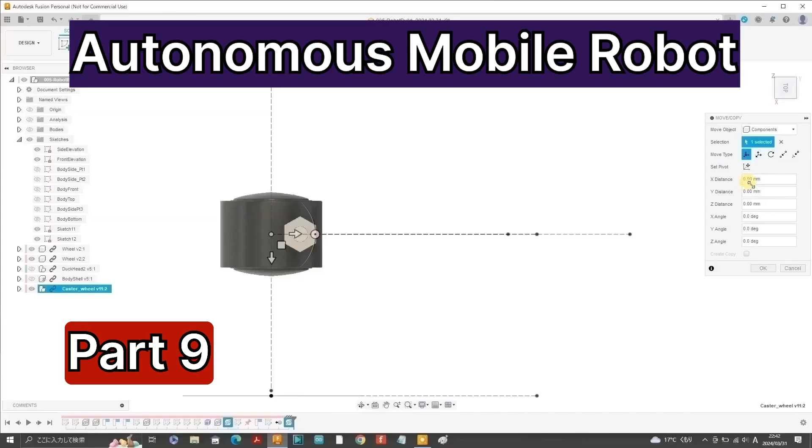Welcome back to part 9 of our DIY Autonomous Mobile Robot Building series.

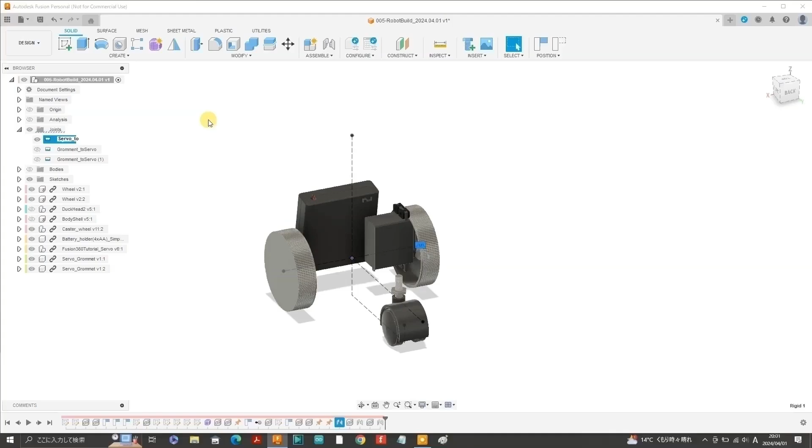In part 8, using Fusion 360, we started to insert some components and arrange these components so they don't interfere with each other or the body shell. In this video, part 9, we'll continue with this process and then start to build the chassis. Let's pick up from where we left off.

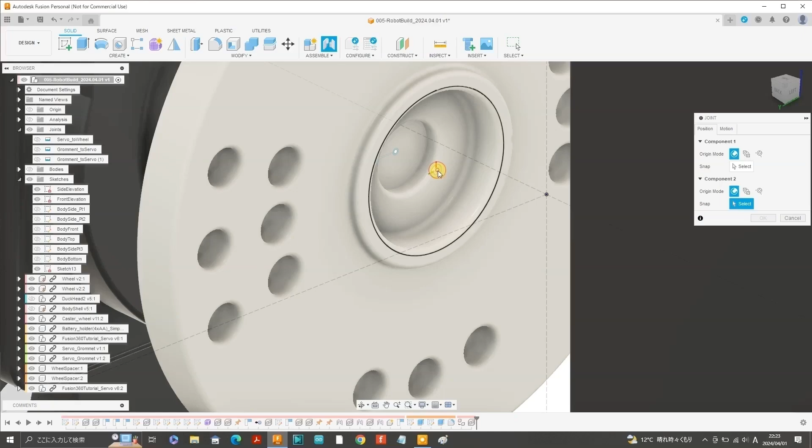We'll begin by duplicating the wheel spacer for the other wheel. First though, we'll need to create a copy of the servo and establish a joint between the servo horn and the center of the inner side of the left wheel. To do this, hover your cursor over the surface or plane where you want the joint, press Ctrl and select the snap joint. Adjust the joint to be 3.7mm in my case from the inner side of the wheel, allowing space for the wheel spacer.

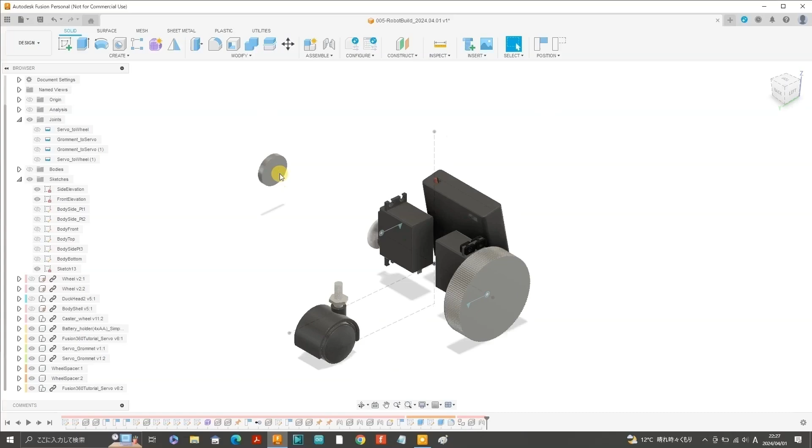Next, hide the wheel and move the wheel spacer, including the washer type spacer. Rotate it to align correctly with the servo horn and hit OK. Since the original copy is already joined, use the Align tool from the Modify pull-down menu. Alternatively, you can create a new joint for the copied wheel spacer with the servo horn. Unhide the wheel and body shell.

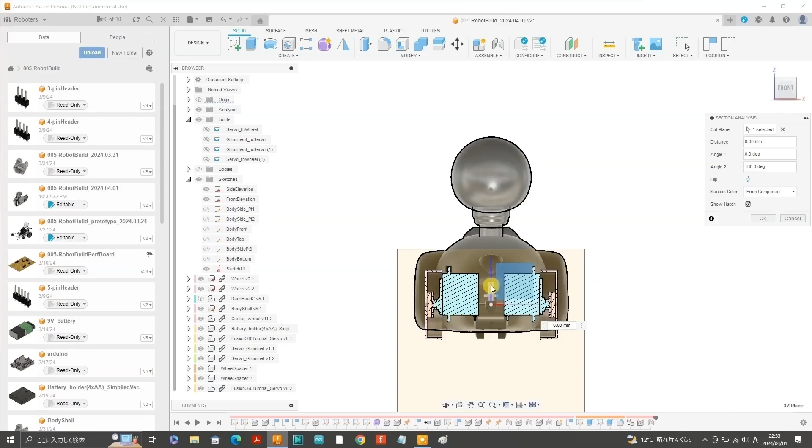Select Section Analysis from the Inspect menu and choose the lateral plane. Just need to flip the viewing direction and we can confirm that the wheel spacers are in the correct positions relative to the servo horns and the inner side of the wheels. Now let's revert to the longitudinal sectional view.

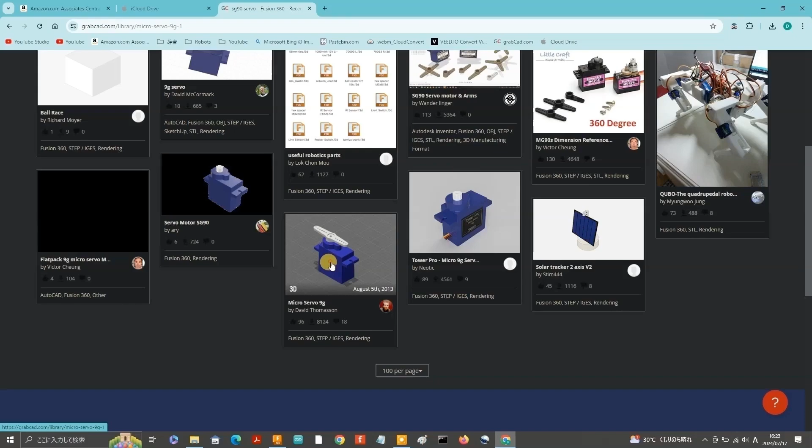I downloaded a step file of this SG90 from GrabCAD. I have included a link in the description where you can access the exact same model. This 3D model didn't include a servo horn, so I downloaded another SG90 3D model and used its servo horn. The link for this other 3D model is also in the description.

I've inserted the SG90 and now we'll move it to the desired position. Turn on Analysis and unhide the body shell. Align the center of the SG90 with the longitudinal sectional plane. Rotate the 3D model to the right and move the SG90 down slightly so that the servo horn doesn't protrude through the neck.

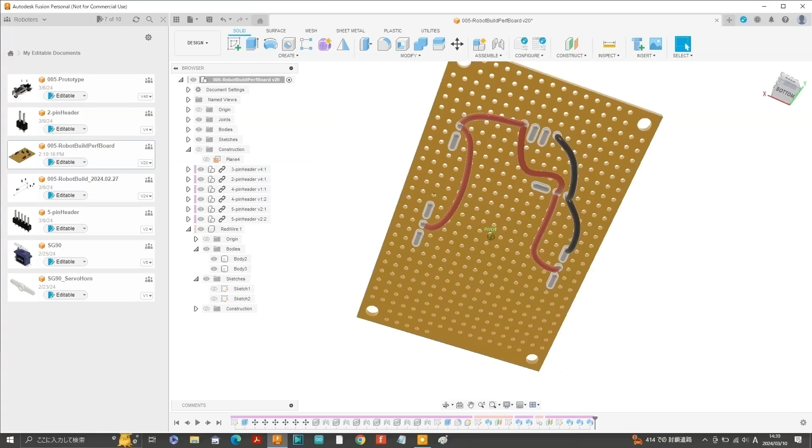If you've been following this series from the beginning, you should recognize this circuit, which was designed in part 2 and built and tested in part 3. I've uploaded a step file of this circuit in my GrabCAD account, and there's a link in the description. So let's insert the circuit or perf board into the design, move to an initial arbitrary position.

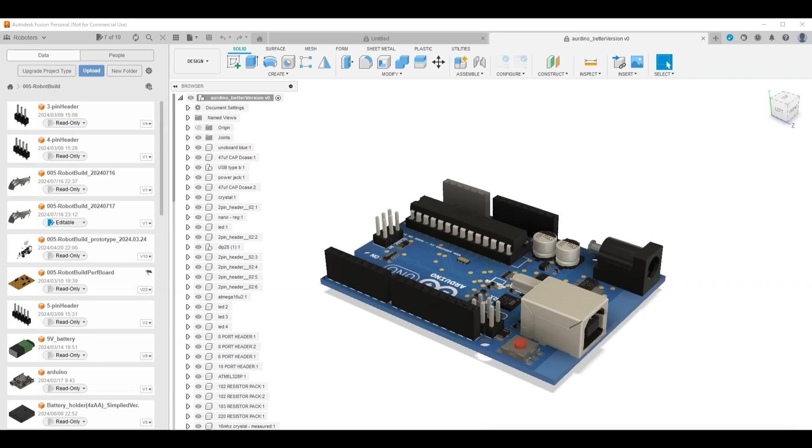We also want an Arduino Uno like this one. The Arduino Uno in my actual design is a different one to this, but this one on GrabCAD seems to be a more colorful version. Check the link in the description for this version. So we'll insert the Arduino Uno into the main design.

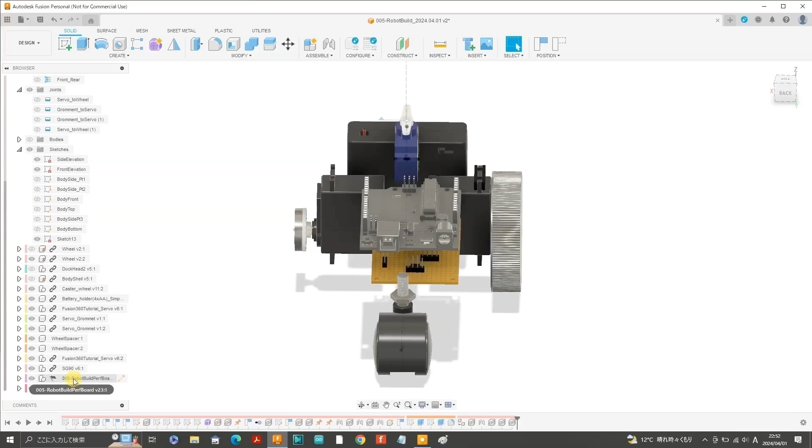Initially I placed the Arduino here, but as you can see, part of the Arduino is protruding through the body shell, which we don't want. I spent quite some time moving the perf board and the Arduino Uno to fit within the body shell boundaries. We also need to move the battery holder to make the switch accessible and also allow for the entire removal of the battery holder for easy battery replacement. So I decided to place the battery holder at the underside of the robot.

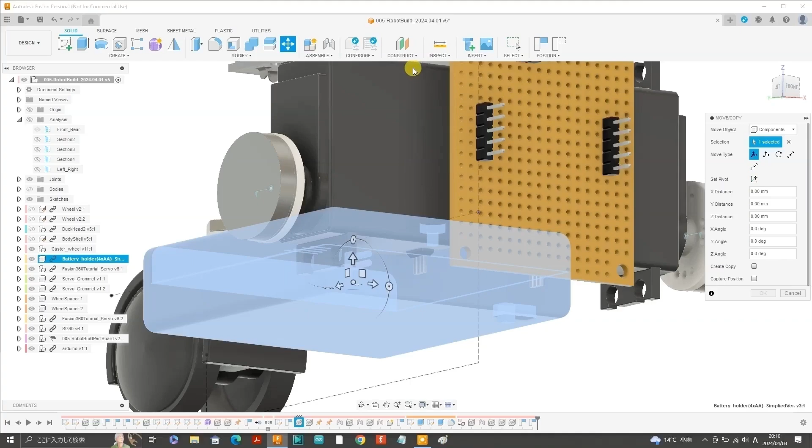However, we also need to ensure that the wires don't interfere with the servo motor. We also can't have the battery holder too low, otherwise its corners will protrude through the body shell. So we'll just move the battery holder up a bit, which I think I have already done in this footage. Move it a bit closer to the caster wheel. That's maybe a bit too close, so we'll move the battery holder forward a bit.

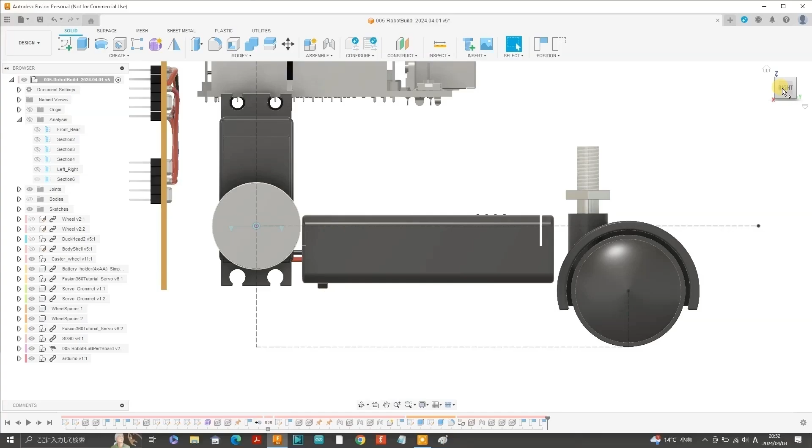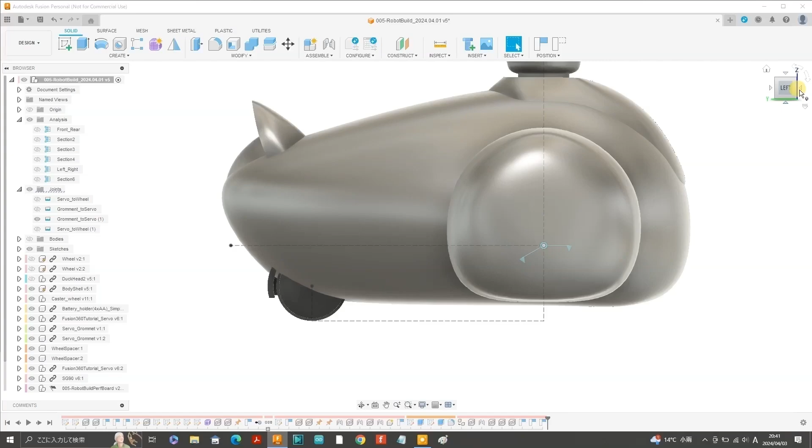Now we're back with the problem of the wires from the battery holder interfering with the servo, but we can deal with that by rotating the position of the servo body by right-clicking on the joint between the servo and the wheel, selecting Edit Joint and rotating the servo by -30 degrees. There is enough room for the two wires now, but let's unhide the body shell and do a section analysis. And zooming in, we can see that the battery holder does interfere with the servo a little. So I rotated the servo by -25 degrees this time for a bit more clearance.

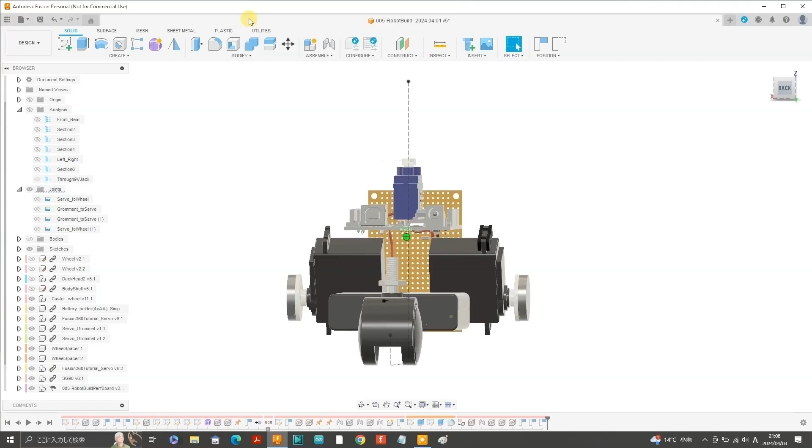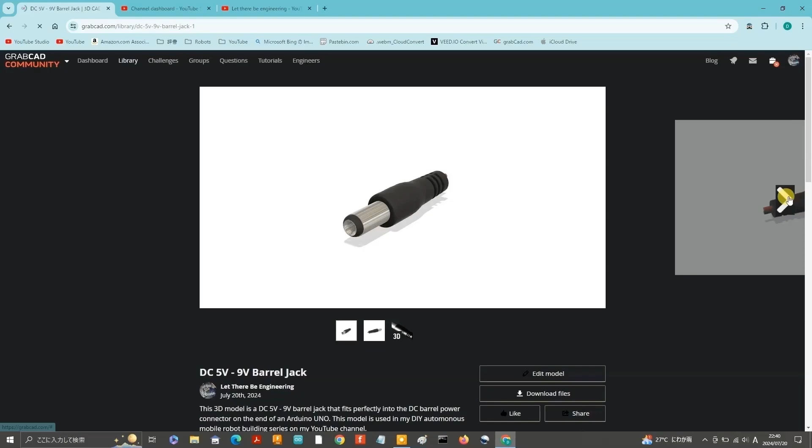Okay, I've now decided on the positions for the battery holder, the Hitec HS311 servos, the caster wheel, the perf board, the SG90 and the Arduino Uno. Here's a 5V - 9V DC barrel jack I created, which fits perfectly into the DC power connector on the Arduino Uno. The step file for this DC power jack is available on my GrabCAD account. Please check the description for the link.

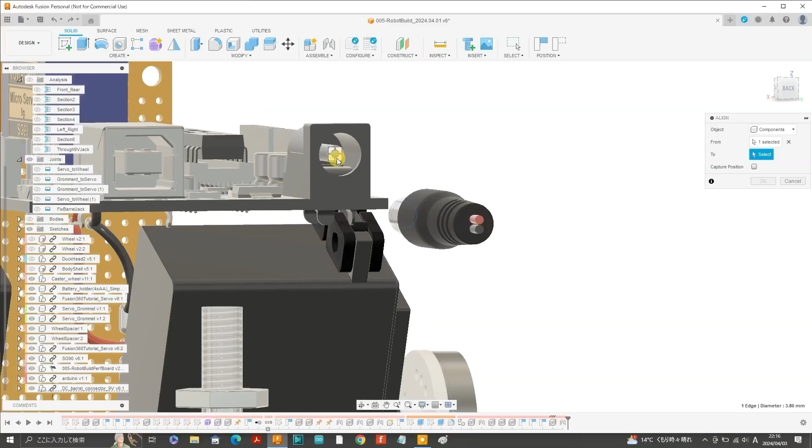Here I've inserted the DC barrel jack into the design. We'll align it with the DC power connector that is on the Arduino. Select Align from Modify and select the central snap point on the plane at the end of the DC barrel jack. Navigate around to the DC power connector on the Arduino and zoom inside the connector to the interface to which the end of the DC barrel jack is to come into contact. Select the central snap point on this inner plane and the DC barrel jack glides into position. And there we can see the DC barrel jack properly connected to the DC power connector of the Arduino.

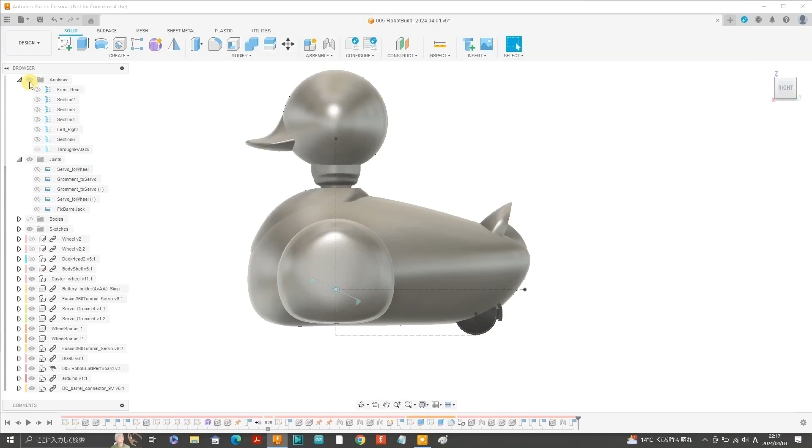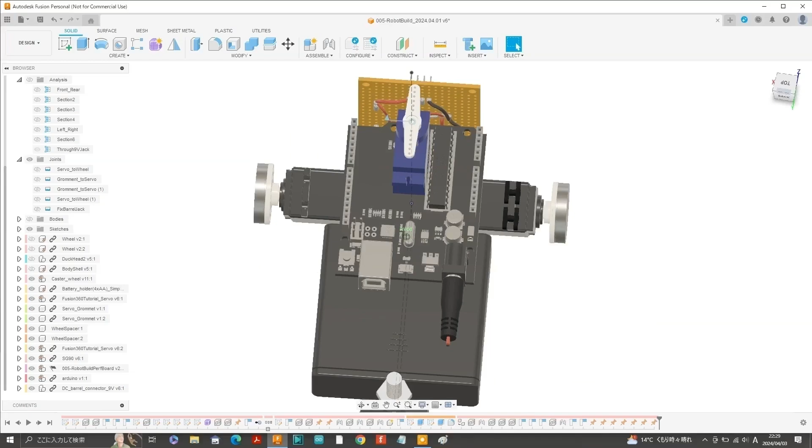Unhide the body shell and perform a section analysis. We can clearly see that the wire end of the DC barrel jack penetrates through the rear of the body shell. So we'll move the Arduino forward, but we need to ensure the other end of the Arduino doesn't interfere with the SG90 servo. In this sectional view, the SG90 and the Arduino don't seem to interfere. In the 3D view, we can see that the body of the SG90 is pretty close to the IC socket of the microcontroller on the Arduino, but there is no interference.

Here's the 3D model of the 9V battery with its 9V battery adapter.

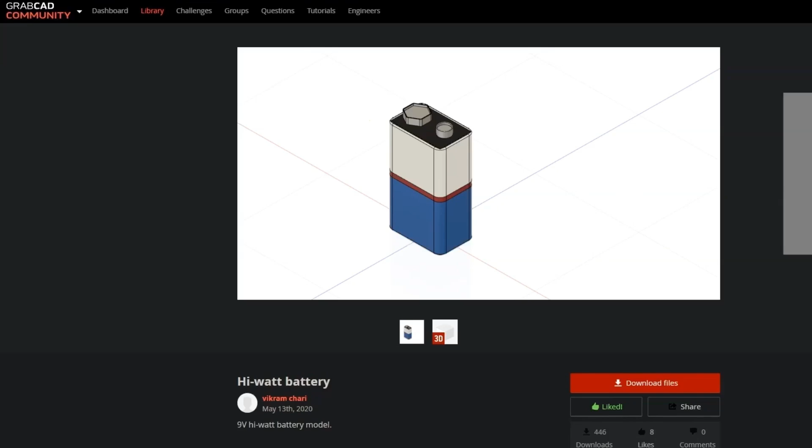The 3D model of the battery itself was downloaded from GrabCAD and I made some color adjustments. Here I have inserted the 9V battery with the adapter attached, and we'll position it between the upper side of the battery holder and the underside of the Arduino.

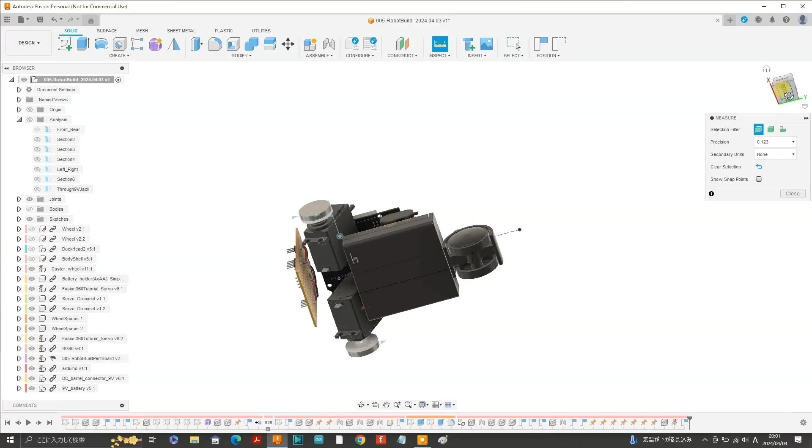The next step is to ensure the battery holder is centered laterally relative to the center line. Select Measure from Inspect, measure from one side face of the battery holder to the center line, and then do the same on the other side. If there's a difference, move the holder by half that amount to center it properly. In my case, 0.75 millimeters.

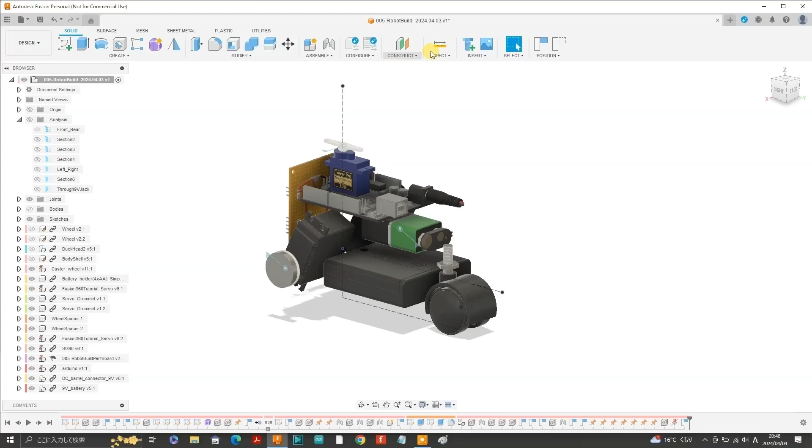Once the battery holder is centered, we'll move the 9V battery to an approximate vertical position and measure again to ensure it's centered. Adjust as necessary by measuring the position relative to the center line in the same manner as for the battery holder. Now that the components are in place, we can start constructing the chassis.

Create a new component and label it Inner Wall. Insert an offset construction plane by selecting Offset Plane from Construct, capturing the position and choosing the vertical plane that divides the robot's left and right sides. Enter 13.2, which will give a bit of clearance from the side of the 9V battery. Select the offset plane and create sketch.

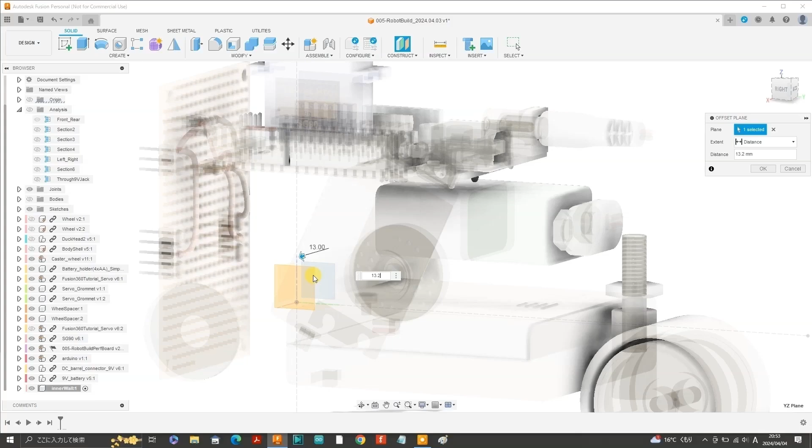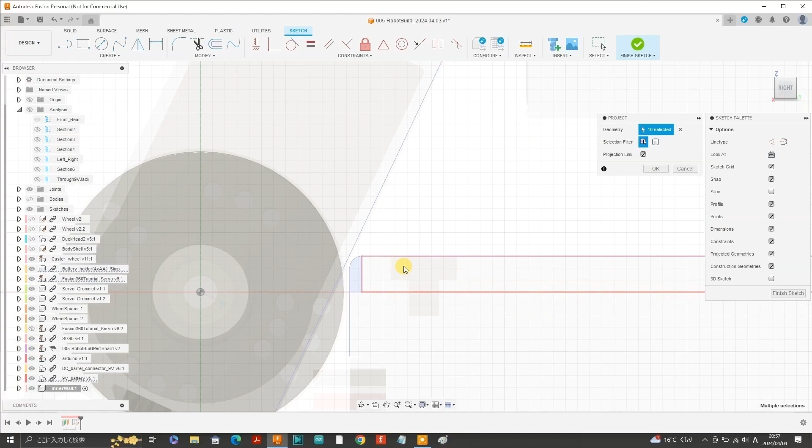To get accurate dimensions, it's crucial to capture the exact locations of the surrounding components. You can do this by pressing P to project desired lines and shapes of neighboring components. Start by selecting part of the battery holder's outline and also part of the servo's outer profile that is angled at -25 degrees, and hit OK. Perform a section analysis along this offset plane, which is at 13.2 millimeters from the center plane. Label it Inner Wall. Now go back to the inner wall and edit the sketch.

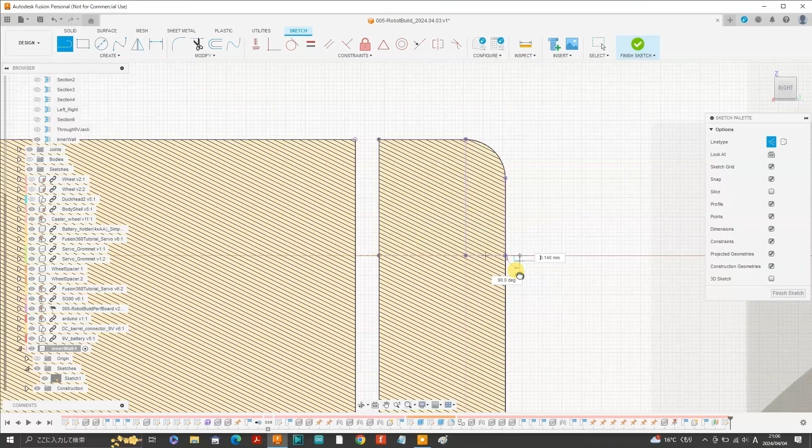The tolerances I'm using here are somewhat arbitrary, but I've measured out 0.2 millimeters, which should allow for a smooth transitional fit between the battery holder and the inner wall edge. First, draw lines and a curve around the rear and upper sides of the battery holder, maintaining the 0.2 millimeter clearance. Next, draw a line parallel to the servo's inclination and add an arbitrary horizontal line aligned roughly with the top of the 9V battery.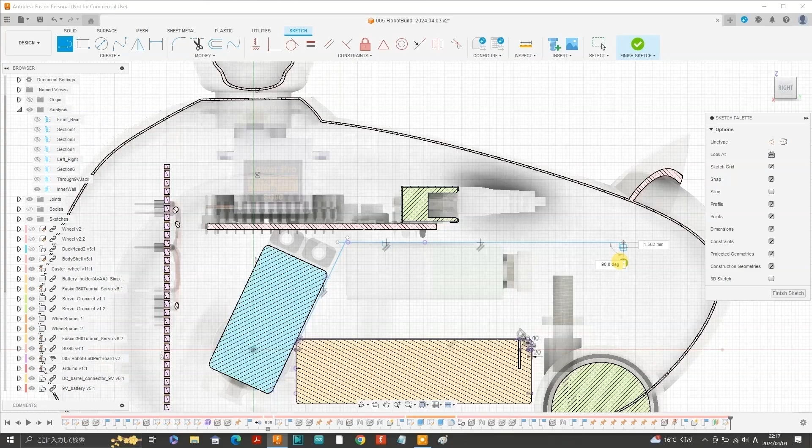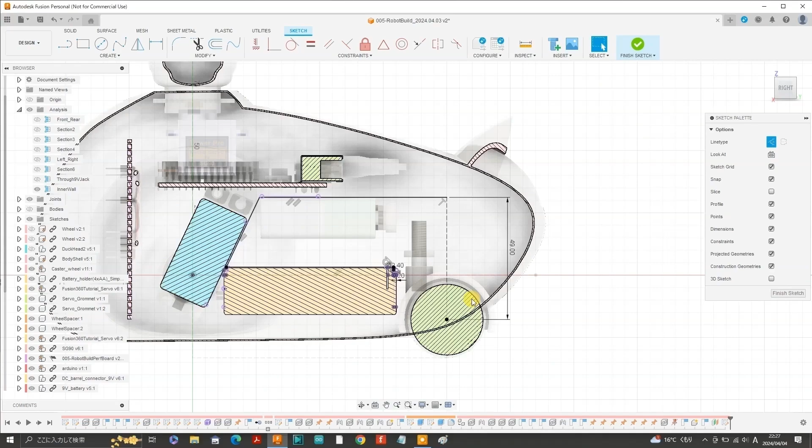Now press P again to project the caster wheel's center point onto the current sketch and draw a construction line from that center point to the horizontal line. I set the vertical position of this line at 49 millimeters from the center point. Use the coincident tool to tidy up any loose ends. Press P again to project the curvature of the caster wheel's wheel guard onto the sketch.

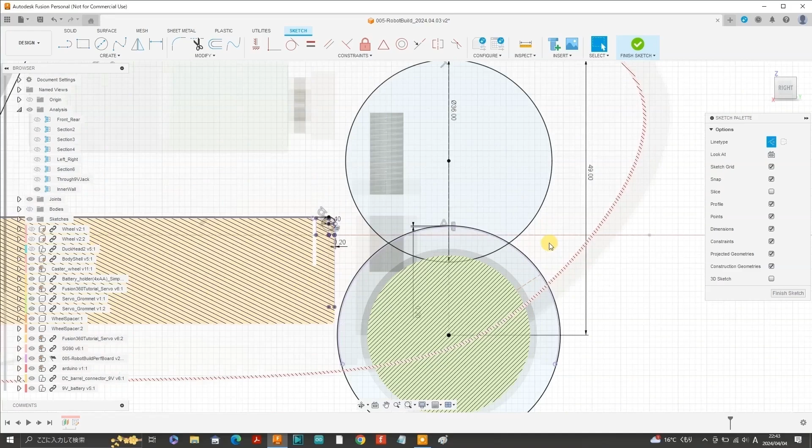Next, sketch a circle that is determined by 2 points, one from the horizontal line and the other on the vertical construction line, with a diameter of 36 millimeters. Extend a construction line from the caster wheel's center point to an arbitrary point on the wheel guard's curve, setting the angle at 56 degrees. Now draw a vertical line of arbitrary length, making it tangent to the circle, and ensure the line's endpoint is coincident with the circle. I initially created a small circle below. Later I removed it as I didn't need it.

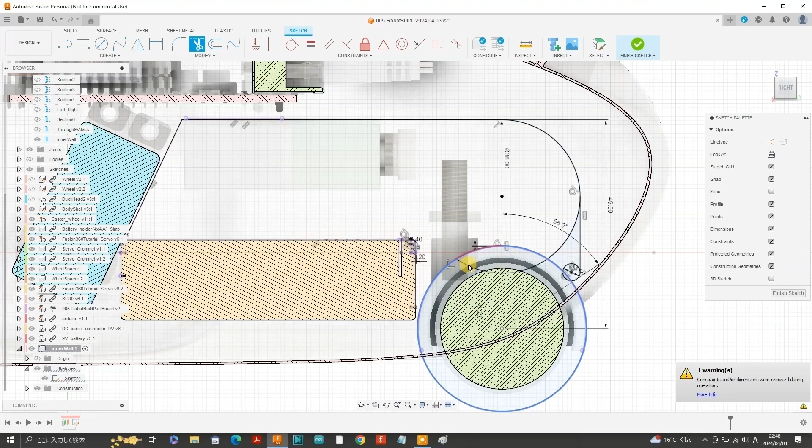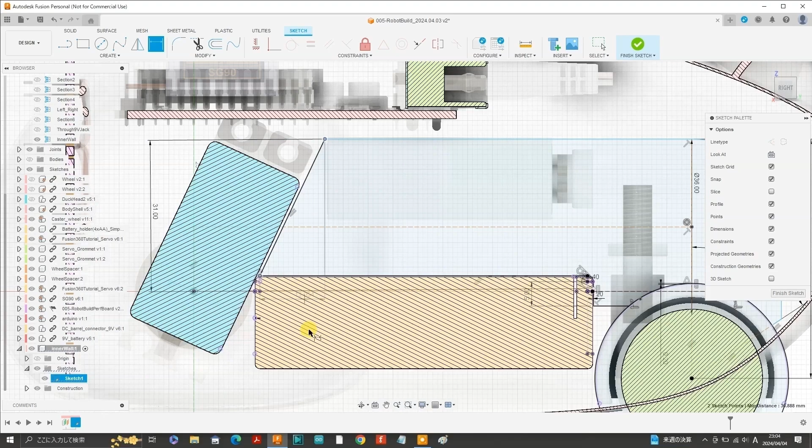Using the trim tool, I removed half of the large circle, which turned blue as it became unconstrained. Then I added construction lines to constrain the half circle again. Connect the lower rear portion to the curve around the caster wheel and finish the rear section by removing the small circle. I also removed another quarter of the large circle and added dimensions to ensure everything is properly constrained. Finish sketch, turn off section analysis and hide the body shell.

Looking at the plane of the sketch we've just created, it is clear that the inner wall is positioned on the outer side of the wheel guard of the caster wheel. The caster wheel is designed to rotate about a vertical axis. However, that may cause the robot to veer off course when reversing, so I think it's best to restrict that movement by extending the inner wall down over the edge of the curved wheel guard.

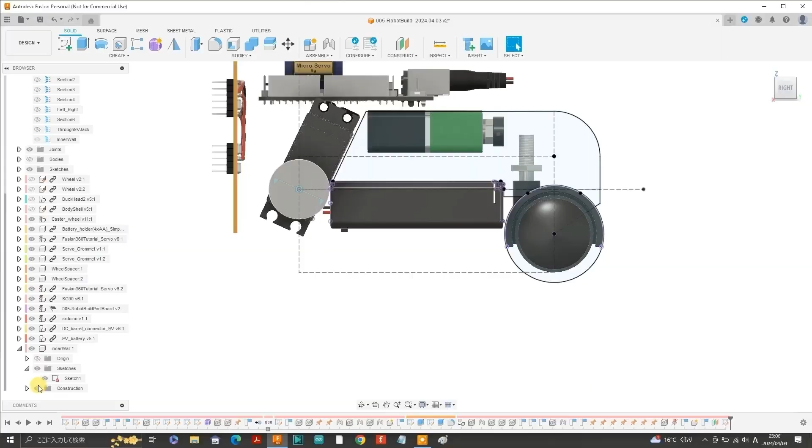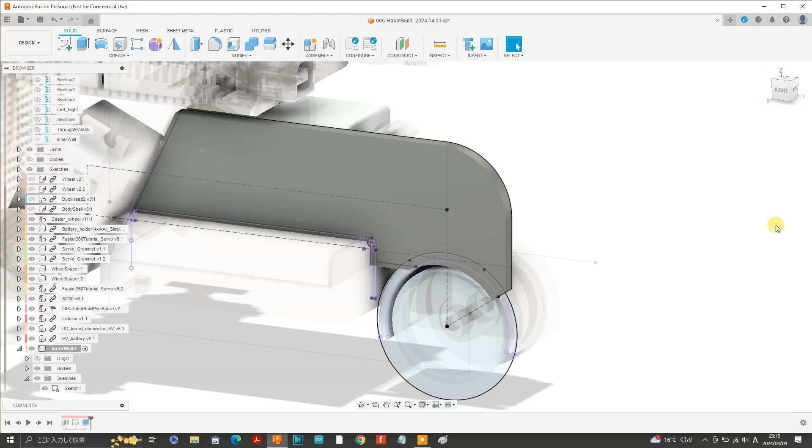So let's edit sketch and press P to project the inner curve of the wheel guard, and then add two short line segments that extend to this inner curve. Finish sketch again, and then select the various portions of the shape of the inner wall and extrude by 3.7 millimeters, which is the thickness of the HDPE board that I will be using. Go to the top of the browser to activate the entire model, and we can see our newly formed left inner wall, which also fits nicely over the wheel guard with a little clearance.